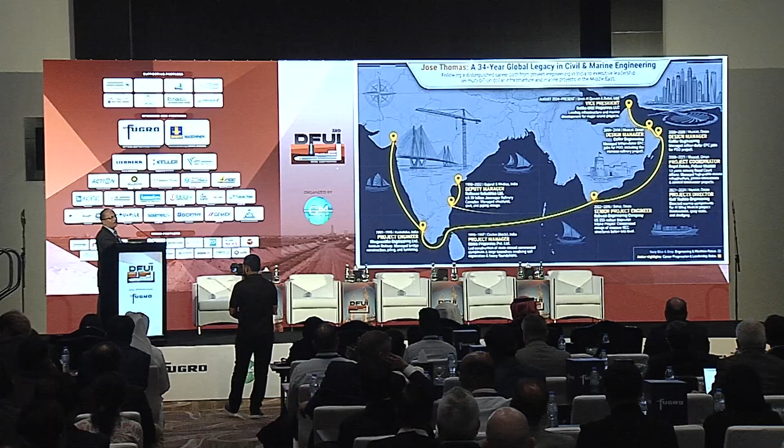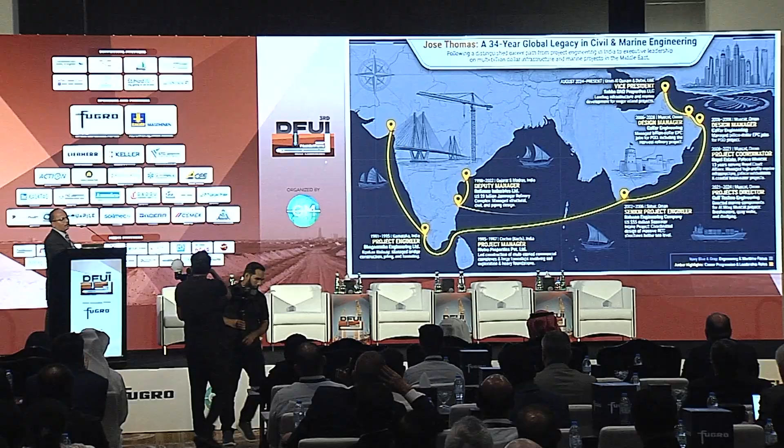Then I shifted to the ruler of Oman, as an advisor for marine works and geotechnical works. I was there with the ruler for almost 17 years. From there, I came to Sobha as vice president, now working in Sobha Siniya Island and Downtown as vice president for infrastructure.

So what I am trying to cover here today is basically how the island is getting developed, because of the major problems you are facing when you are developing an island.

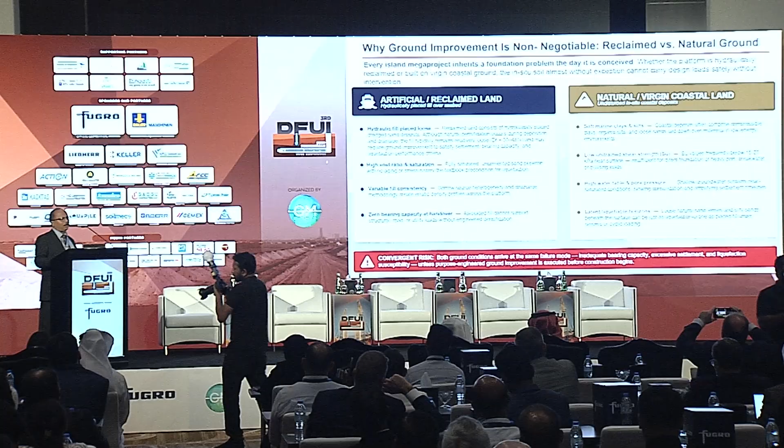This island in Siniya is not reclaimed, naturally land given by nature, and we are not touching any of the profile. What we are doing is all the soil investigation, filling and soil improvement, and making a big township which consists of almost 7,000 apartments and 700 villas.

The first phase will be delivered by the end of 2028, and the entire phase of the 23 million square feet will be delivered by 2029. So what we are doing here first, we are doing a dredging of the entire area.

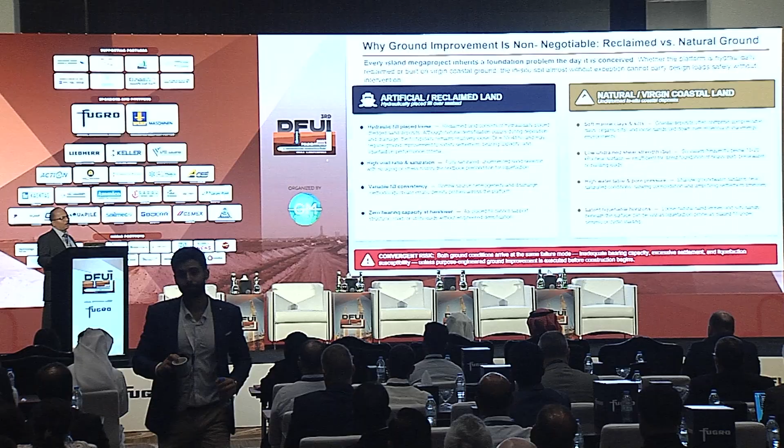The entire area will be having a big marina for around 374 boats, which is almost half of the Dubai marina, and we have got a full island. What we are doing is dredging the channel and creating a marina, and the dredged material is used for filling.

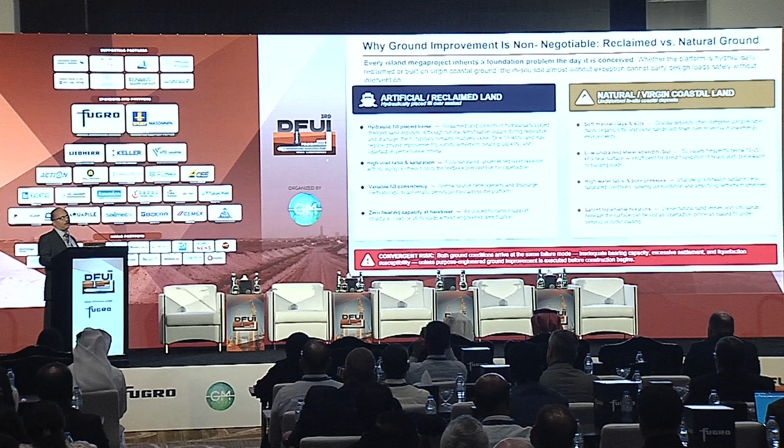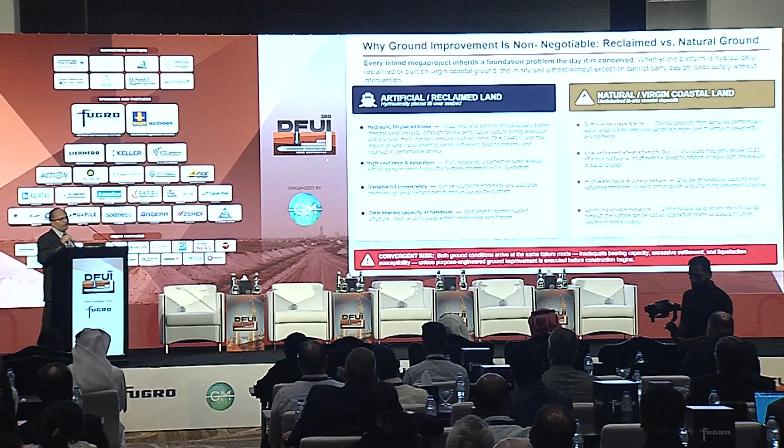That filling material - before starting the filling, we go for investigation work. Usually we go for borehole test, CPT test, then post CPT, then different types of compaction. So here we are trying to cover the different types of compaction we have used on the Siniya Island.

Basically the compaction was done to mitigate liquefaction due to earthquakes. The soil, particularly in UAE, is sandy soil. So whenever there is an earthquake, there is a seismic action, and it acts as boiling sand, and the entire thing collapses.

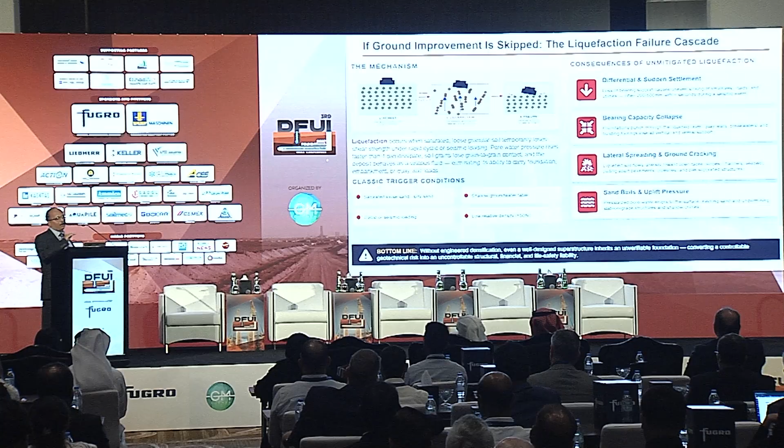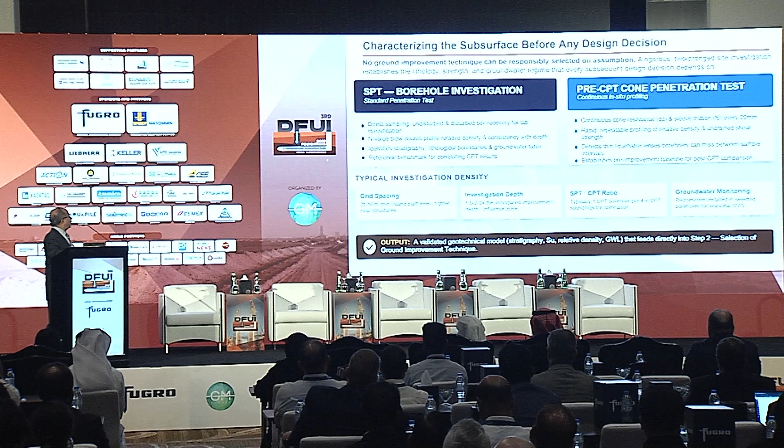Once we did the investigation, we found there was a soil layer around 8 meters down below the filling which had liquefaction potential. So we did deep dynamic compaction, where the soil was improved up to 8 meter depth, using around a 20-ton pounder coming from around 20 meter height, compacting the soil up to 8 meters.

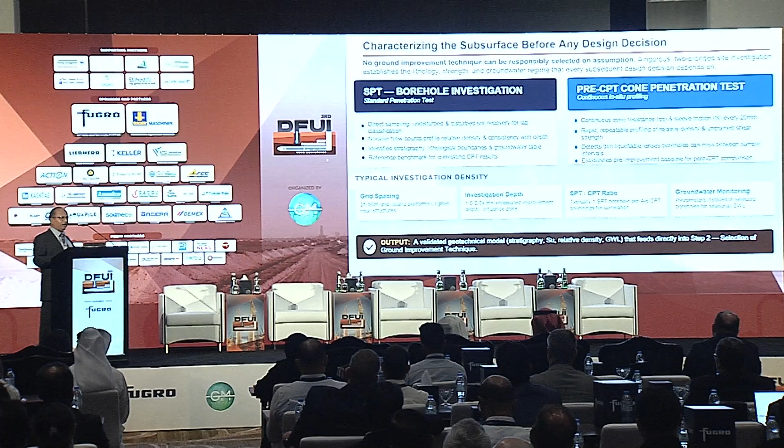Then after that we do the post CPT test, then the zone load test, then vibro compaction - these are the methods that we usually use. I don't know how many of you are familiar with these methods. I think we are all geotechnical engineers, so I don't need to explain the techniques in detail.

We had a company called Swiss Boring doing the soil improvement for us, and our geotechnical consultant was GTC, Dr. Imad - I think most of you may be familiar. Our marine consultant was MCA, and our infra consultant was RTC.

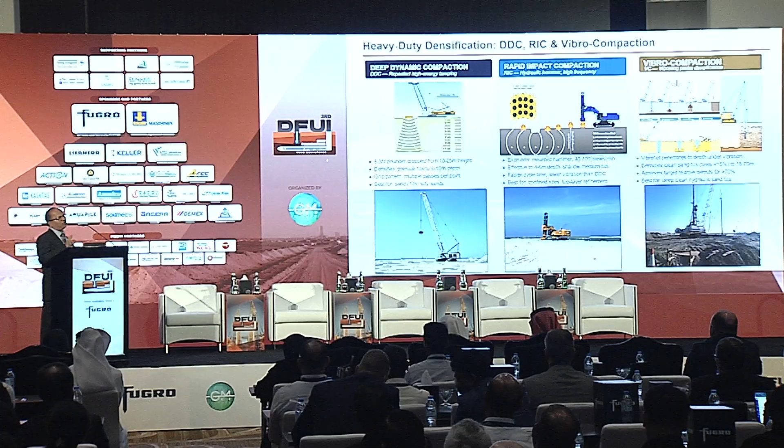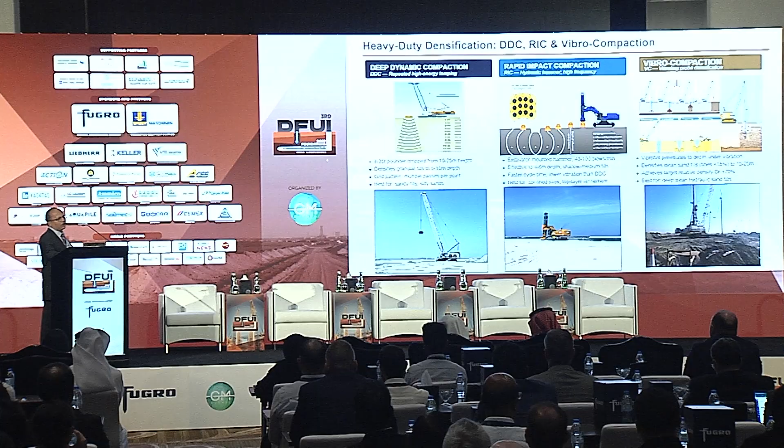After that, we do the post-CPT test. In the post-CPT, we see that the entire 8-meter depth from up to down is totally compacted, up to the required 10 megapascal CPT value that we have to attain.

We do the zone load test to ensure that the safe bearing capacity of 150 kilonewton per meter square is reached at the founding level of the foundation for the villas. And for piling, we are going up to 35 to 40 meters for the multi-storied building.

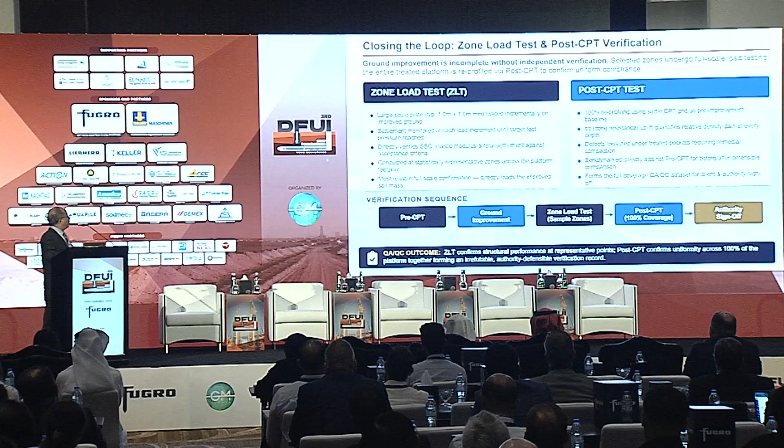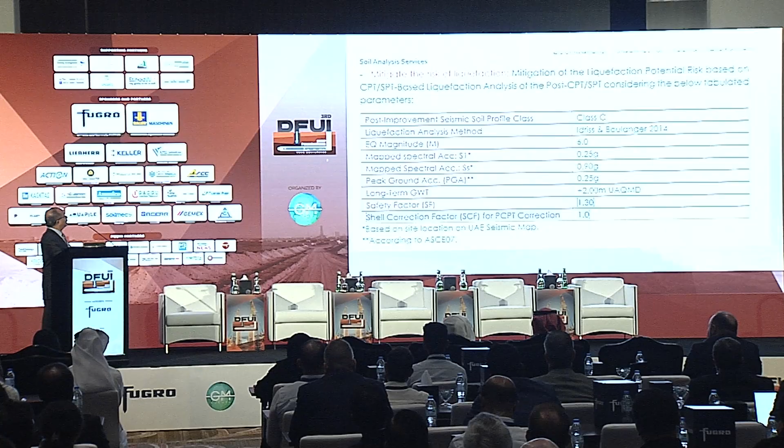All the liquefaction potential has been mitigated by soil improvement techniques. So these are the different methods we use: pre-CPT, ground improvement, zone load test, then post-CPT. Then we go for the authority sign-off before we start all the work. These are the parameters we are meeting when doing the soil improvement techniques.

This is a zone load test we have carried out, and the post-CPT test being carried out. This is the actual site photographs.

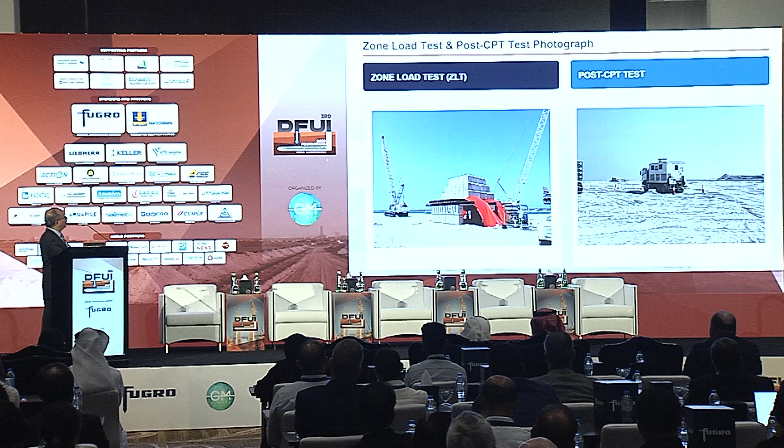I am not going into the engineering details. If anybody wants any further clarification, you can contact me anytime. I'll be ready to help you.

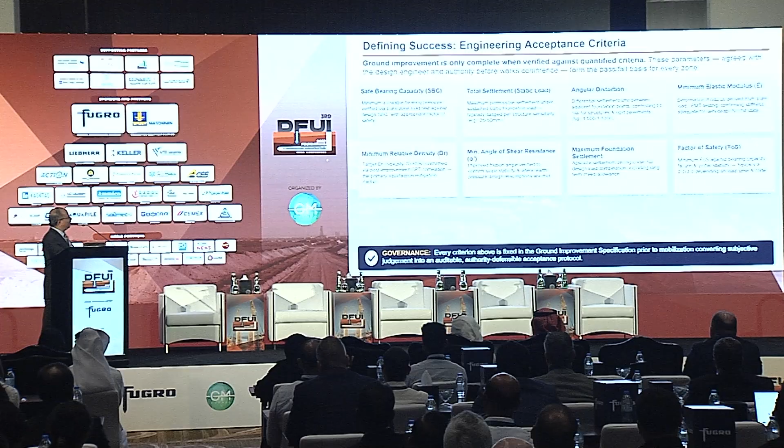As I told earlier, when we did the investigation, we had a liquefaction potential at around 6-meter depth. There was very loose soil with some cavities, and we did some MASW. I think you know what MASW is - it's a surface wave test we do to find whether there are any voids below.

We found that there are some voids, so we have mitigated all the drawbacks and improved it properly. All the liquefaction potential was mitigated, and we have completed all the works. Now we have started the villa works, the piling has started, and now we are on the superstructure stage.

Now, these are the issues that happen if we are not doing a proper investigation. Some mitigation measures become very expensive. So usually the mistakes small developers make is they don't go for the foolproof investigation.

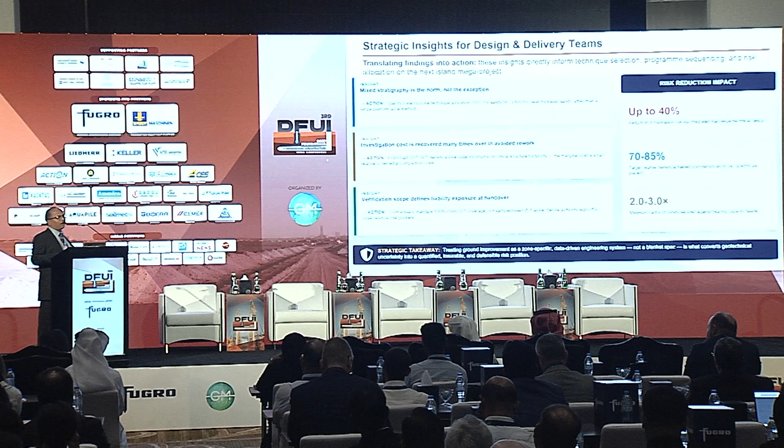They directly go for some minor SPT test, borehole test, and sometimes they find unequal settlement, and the building gets tilting - some problems, because the entire thing is sitting on an island. The entire building may stand, but the entire road may settle down if there is earthquake potential.

So these are the case studies we have done, and I already explained the pounder drop and vibro compaction method. I am not going into much detail. Rapid impact compaction is required when the depth of compaction needed is only 3 to 4 meters, versus deep dynamic compaction.

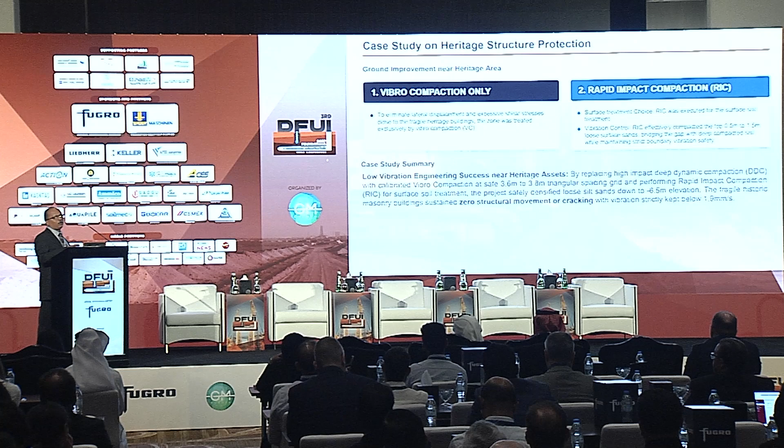After doing the road work - after the compaction is done, we fill up to 3-4 meters for the road embankment with dredge material, and we go for rapid impact compaction.

Now I am going to tell how, because this is a marine and geotechnical interface. This is total reclaimed land - we are reclaiming the soil from dredging, and it is totally exposed to the sea, and there is flushing happening inside the entire scenario, the entire island.

Water is coming inside and going. Some of you may be familiar with marine dynamics - basically we have two high tides and two low tides. During high tide, water enters the island, and during low tide it goes out. If the flushing is not happening properly, the water will get stagnant, and there will be foul smelling.

So we have done a hydrodynamic model, flushing model, and did the entire study for this, and we found we are making channels and culverts so that it correctly exchanges all the water. Every 4 to 5 hours, the water is getting exchanged, and seawater is going and coming inside.

I'm just trying to show what studies we do, because now I'm going a little bit into the marine side, even though we are talking about geotechnical. We do hydrodynamic model, metocean study, wave transformation model, flushing study, bed shear stress, and flood inundation.

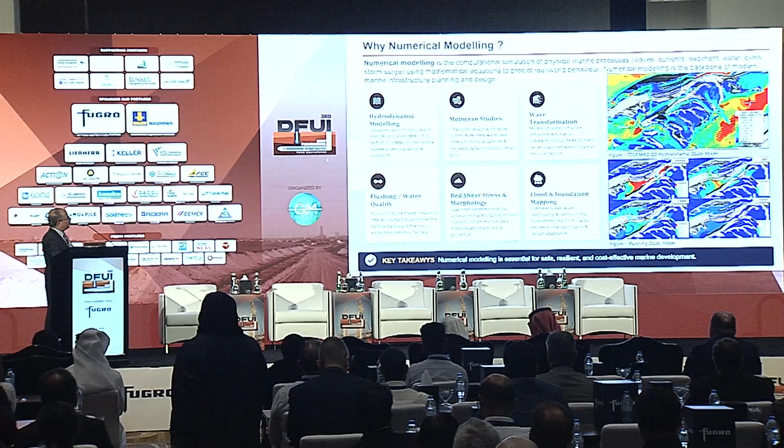This is the right side - you can see the island we are developing and how the flushing is happening during high tide and low tide. It is modeled using mathematical modeling software called Telemac 2D.

And this is the quay wall we have made. There are different types of structures we are using, like breakwaters, quay wall, groynes, revetment, beaches, jetties, and marinas.

This is an actual photograph of the left side. You can see the quay wall which is already constructed, almost 3.4 kilometers, built of concrete gravity blocks, and we are having an entire marina going to be built over there.

So in another 2 years, you can experience the marina - people can come inside. It is near Marjan Island where the casino is coming, just around 15 minutes by boat from Marjan Island. So it will be the next Dubai for the UAE, our development in Siniya Island.

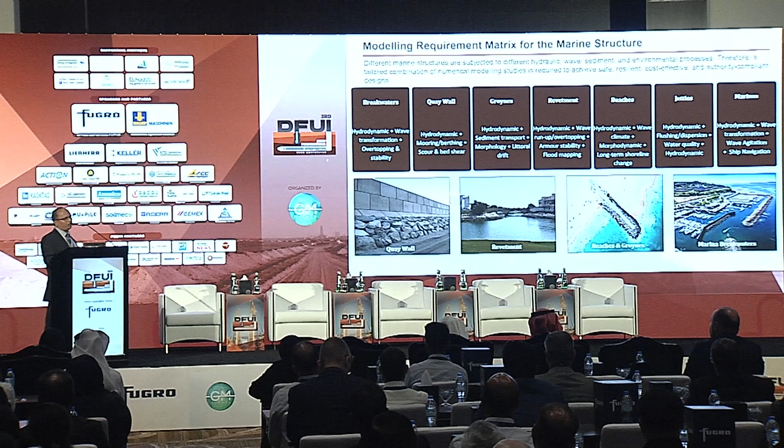We have done the bathymetric study to ensure that all the works has been done properly, and after the dredging, we do the post-bathymetric study.

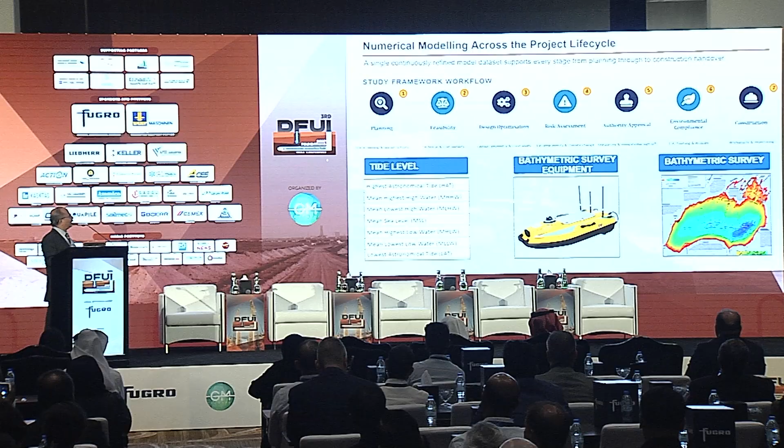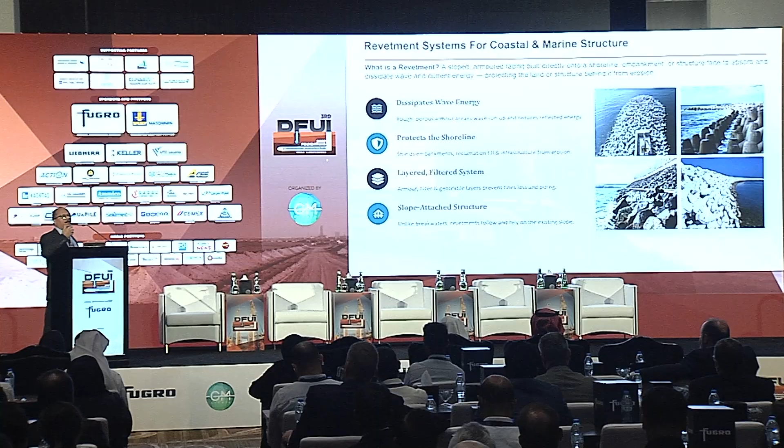Here I am going to tell how a coastal structure has failed due to improper engineering. In a coastal structure, mainly there are so many elements. If it is a breakwater, we call the Core-Locs, which is the outer layer. Then we have got the under armor layer. Then we have got the core material. That is how the wave energy comes and hits a structure. The energy is being dissipated at different levels. The outer structure, like Core-Locs, are bigger structures, and they dissipate the energy to their level. It transfers to the under armor layer and hits it. By the time, the energy is zero, and the core will be safe.

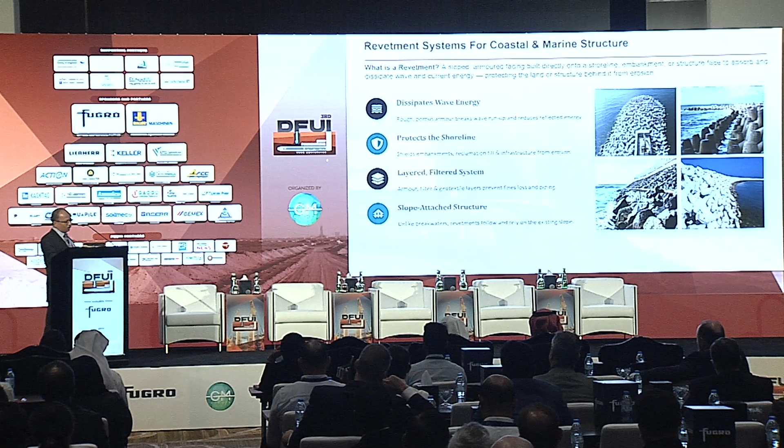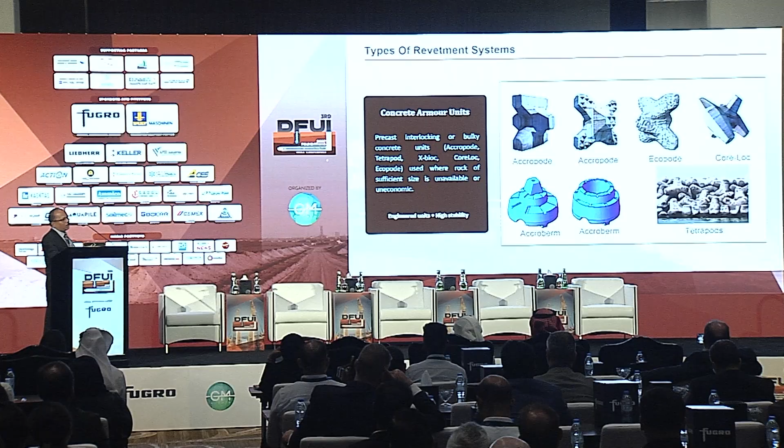I'm just going to explain where a structure has failed due to improper engineering. It was in Oman. These are the different armour units we are using for the outer layer, like Accropodes, Ecopodes, Core-Locs.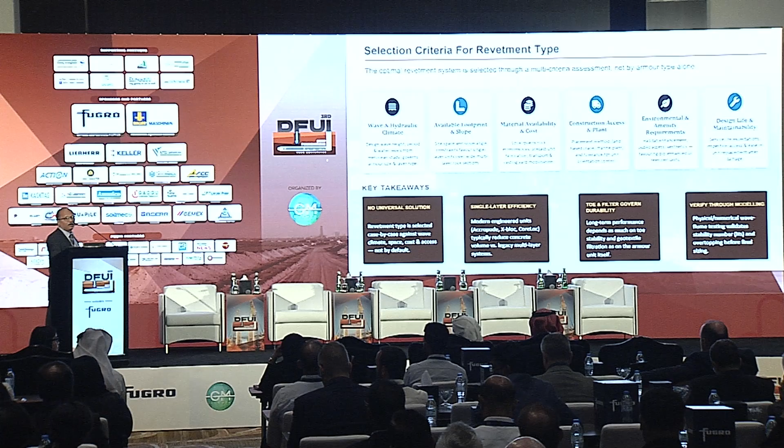You know, if you are aware, there was a cyclone Gonu which hit in 2007 in Muscat. At that time, what happened? We had designed the entire coastal protection up to case A and B, but what actually happened in Gonu, it was not as per the design. So sometimes we have to see the 1 in 100 year return period, and what the past histories were. After Gonu happened, we redefined the benchmark for designing all the coastal structures.

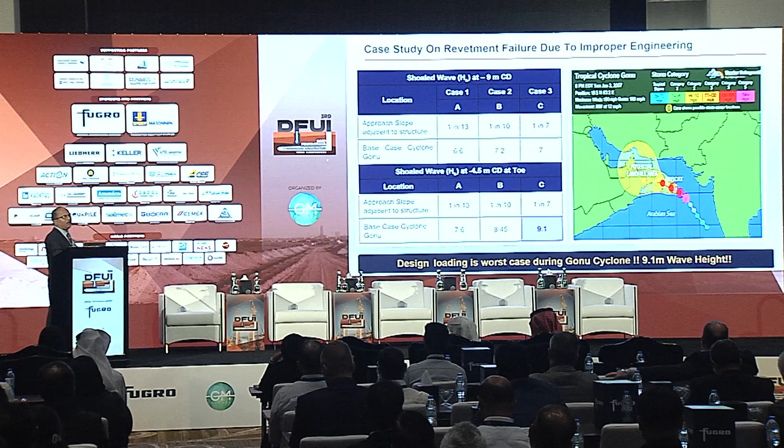This is, you can see on the right side, the photo where the Gonu started. It hit the Muscat mainland, and you can see a lot of structures failed. The road was washed out. The entire area was flooded with water. You will not even imagine, 7 to 8 meter water got flooded, and some of the Toyota showrooms were washed off.

So I'm just going to show one of the structures which failed, in Oman, Muscat. Earlier, the structure was designed as a revetment structure, having shed units on the outer side. Can I have a pointer? Is the pointer there?

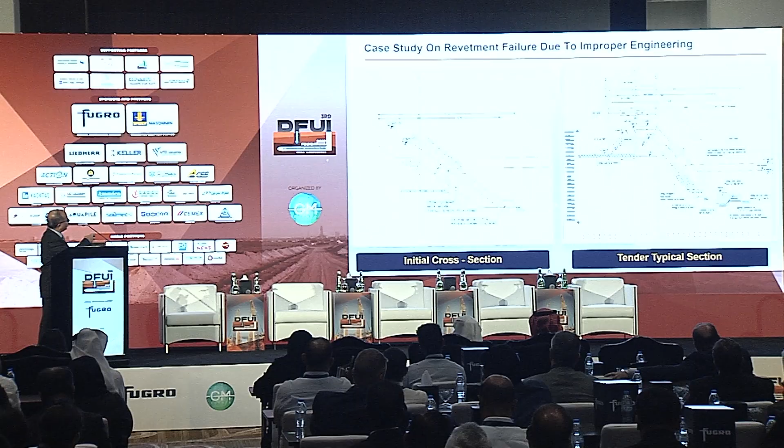Left side is a structure which failed, and right side is a structure on which we did the re-engineering. The initial structure had a filter layer, which was a shed unit, and below that we had an under armor layer. But what actually happened, the under armor layer, even though it was written as under armor layer, physically it was not there. So directly what they had done, they put the shed units on the core material, and when Gonu hit, the entire structure failed, collapsed and fell down, and the major ruler's palace itself was flooded. So I was appointed as one of the consultants, and I did the engineering.

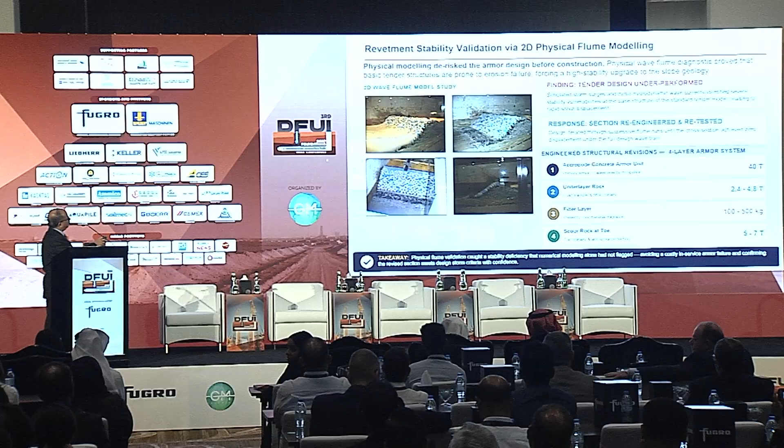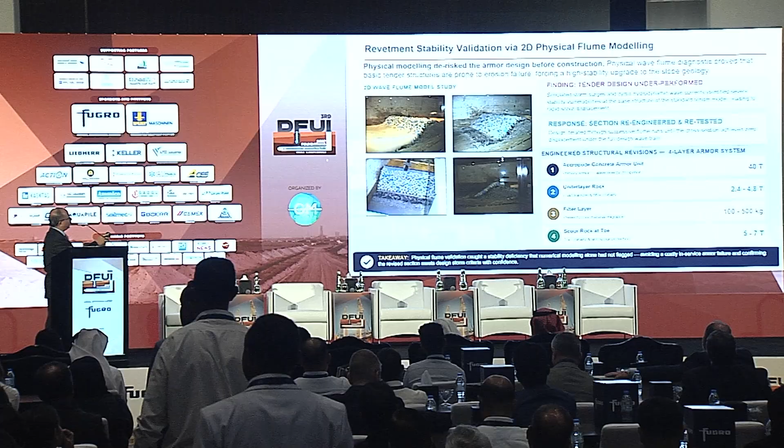I worked with a company from UK, and we did it. You can see the physical wave flume model we did, and we suggested going for a concrete acropod armor unit, which is 16 meter cube, 40 ton, as the outer layer. Then we have got under armor rock, which is 2.4 to 4.8 ton. Then the filter media and the scour protection at the toe.

So I'm just showing the structure. What we did - there was an initial structure you can see below, which had failed. On top of that, without disturbing it much, we made the entire structure, which is around 1,000 meters in length. We went for acropod units and an under armor layer, and the existing structure was used as sacrificial. We did this work in 6 months' time, in record time, and it was restored in 2008, and it is still standing. This structure had failed 3 times.

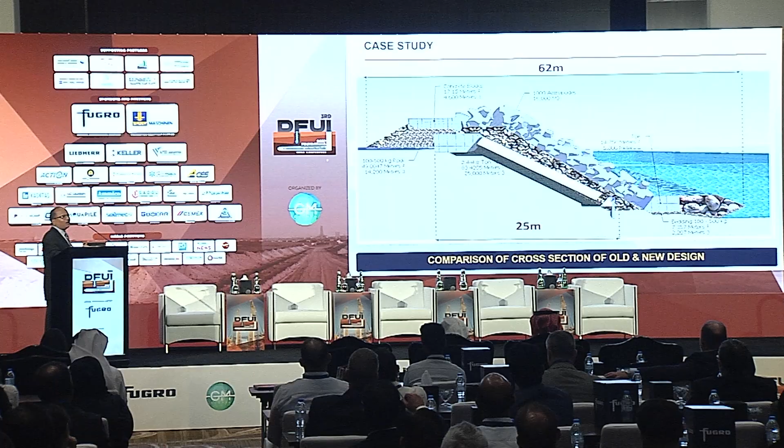Why am I trying to show that it was poor engineering? We neglected the geotechnical part when designing a coastal structure. So I am just trying to show how a coastal structure interacts with the marine structure and with the geotechnical parameters.

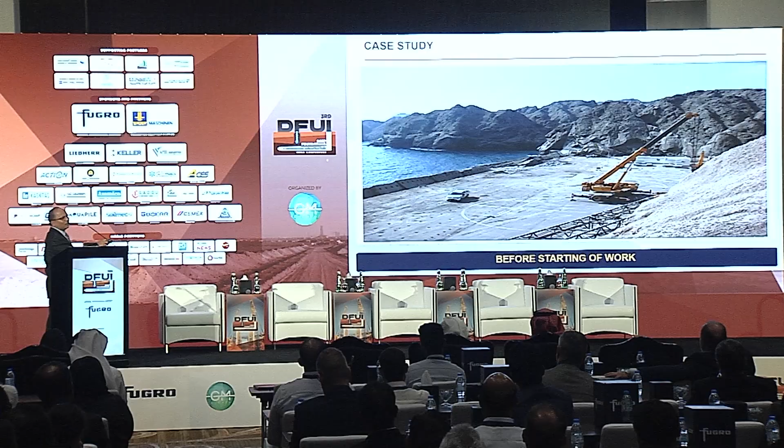I am just going through the site photographs of how it failed. Such a huge structure, 40 tons, overtopping and going into the sea - you can imagine the wave energy. So, how it failed and how it was reclaimed, and this is the final structure, how we built it. I am just going through the sequence of how it was built.

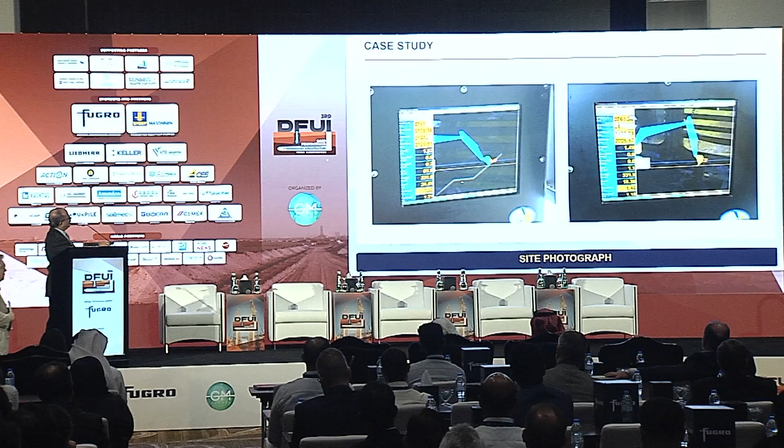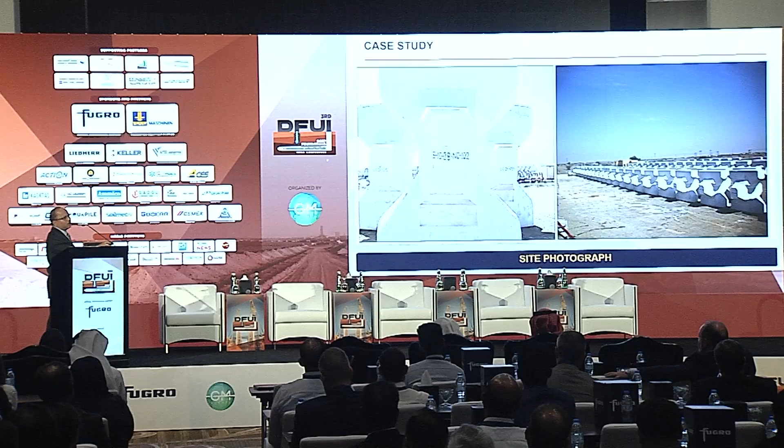I am just going through the photographs of how we did the dredging, and this is the Core-Loc units of 16 meter cube, 40 tons each. It was placed - CLI was the agency who supplied the engineering for the Core-Loc, and it was placed using a crane. After completion, this is how the structure looks.